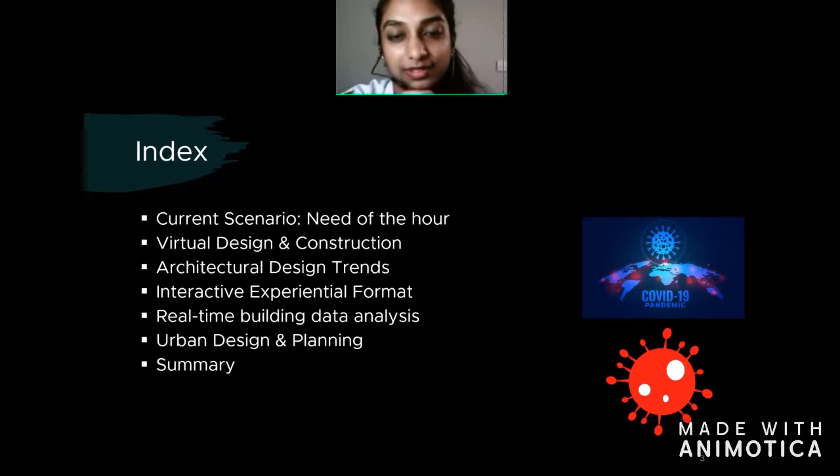Some of the keywords I compiled for this presentation and how I would be focusing on them: spatial proximity analysis and how it feeds back into urban planning and design; VDC, virtual design and construction, a very sought-after field of engineering and construction; next, digital interaction, which can be in the form of learning, entertainment, or just interaction in terms of communication.

Next would be gesture recognition, powered by AI and IoT to provide a touchless technology system in the near future, which is a very big possibility we might notice. Finally, energy models - how energy modeling is very important when it comes to dealing with the indoor built environment and the health of buildings in general.

As we all know, this pandemic of COVID-19 is continually upending and disrupting our lives across the globe, and it has become very evident that this will affect our built environment and how spaces are conceived in the future. The role of building technologies and building-specific software will play a big role in how we interact with people, with the built environment, and with nature. All this will be explored in a wide aspect.

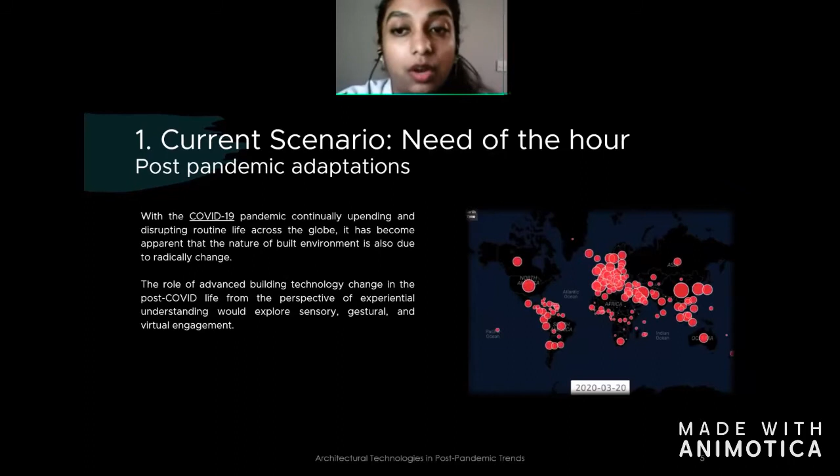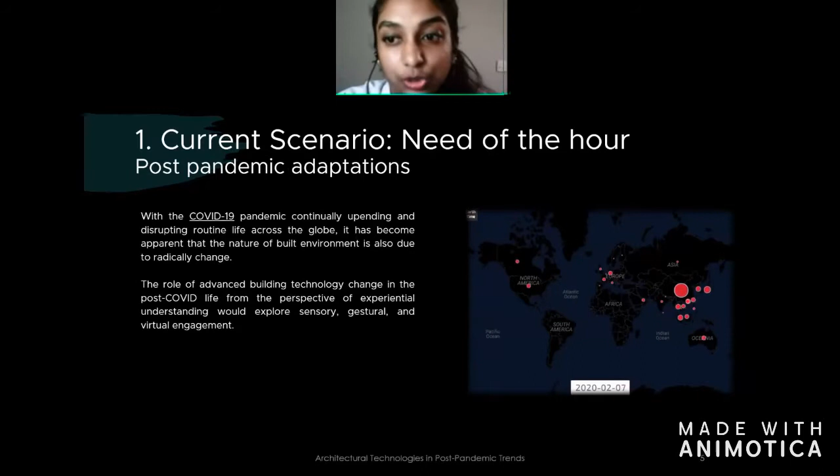So as you see in the map of how the COVID spread changed so drastically, it's very important that we come up with a solution immediately to deal with this widespread pandemic.

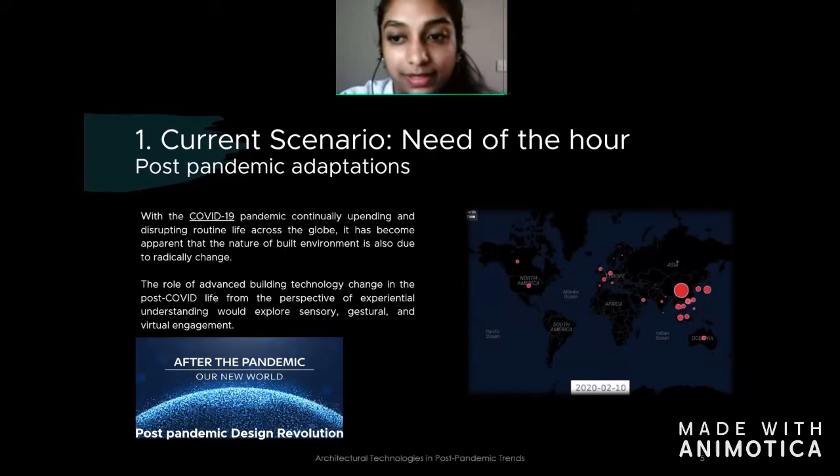So this definitely calls for a post-pandemic design revolution, which I believe will be noticed in the near future, and how we will take into account a number of factors while designing, while planning, while executing. So this term I would coin as post-pandemic design revolution.

As we all know, a lot of plans and strategies are being conducted presently to keep social distancing in mind, to keep 6 feet apart, to keep people from going out as much, and how this will all be narrowed down based on pedestrian movement and things like that. These are some of the basic things we will definitely see in the near future, and how innovative solutions to office planning, hotels, or even hospitals will be affected by all of this.

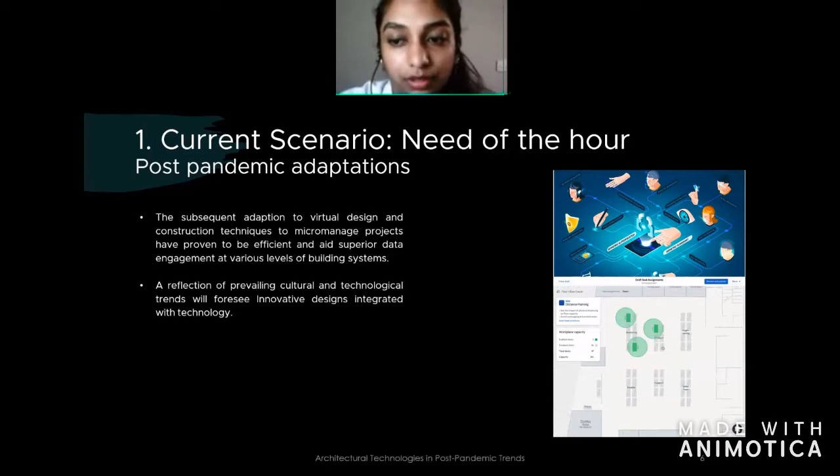So the engagement in terms of how the project is managed and how the data can be efficiently layered is something that is very important at this point in the year. And this could also be used as a virtual experience of events.

As you all know, festivals play such a big role in the cultural identity of a place, and there are already implemented techniques where the entire festival could be virtually online, and you could still get the same experience.

So the next topic would be virtual design and construction, which is a BIM level management of projects. With this pandemic and having to maintain social distancing, it is difficult to carry out site functions, but with virtual design, you can pre-analyze and pre-plan all your events virtually.

This also helps in collaborative meetings, and it has proven to be more efficient during this pandemic for a lot of companies here in the United States. VDC is very compatible with remote working environments, and using technologies by Autodesk has definitely proven to be very useful.

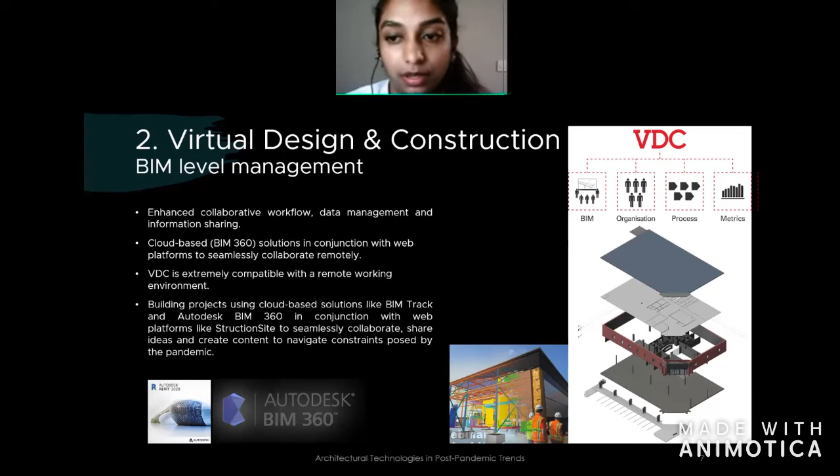And as I mentioned before, we would see strict guidelines in terms of how they're maintaining distances between people, distances between lines and queues, and all of this will tie down to how they are integrated on a larger plan or the urban design level.

As you all know, the smart city concept is not very new, but such things are proving to be more relevant now, and people are giving more importance to such techniques so that they can easily feed data onto buildings and have data integrated architectural planning systems, making it easier to monitor the spaces, have sensors in each of these spaces, and manage the entry points.

They can track contact tracing, guide people around more easily, have temperature checks, heat mapping, and things like that.

Such physical assets that are represented digitally are called digital twins. And such digital twins are powered by IoT and AI, and they can predict and even give you data analysis, or data analytics as we say, for future predictions of monitoring and resource planning.

So if a building is monitored entirely through sensors, then if one area is shown to have a higher heat map because of a number of people entering, or if one person might be contracted as positive, then the lockdown system of the entire building could be tracked and mapped from that one single room to the entire complex.

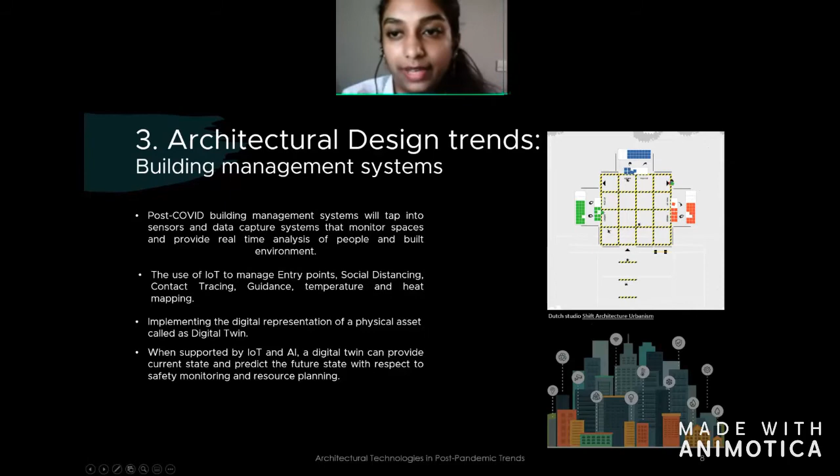So what you see above is a brief example of how Shift Architecture Urbanism Studio is practicing their guidance and their line system in terms of social distancing.

In a more interactive format, I'd see this experience of post-pandemic design trending towards gestural and sensory-driven recognition. Gesture recognition isn't new, but a lot of technology and research is going on in this field. With this being a contact-based virus, and contact being crucial in spreading it, it has become more important to have touchless or contactless technology, minimizing interaction with objects that might be constantly touched by a lot of people. Such technologies often involve interaction with keypads, buttons, or gestural interfaces.

The reason I put this reference is so we can see this as an example when trying to create, at an urban design level, parking systems or pedestrian walking systems. Such things can be overlaid or retrofitted in an urban design context.

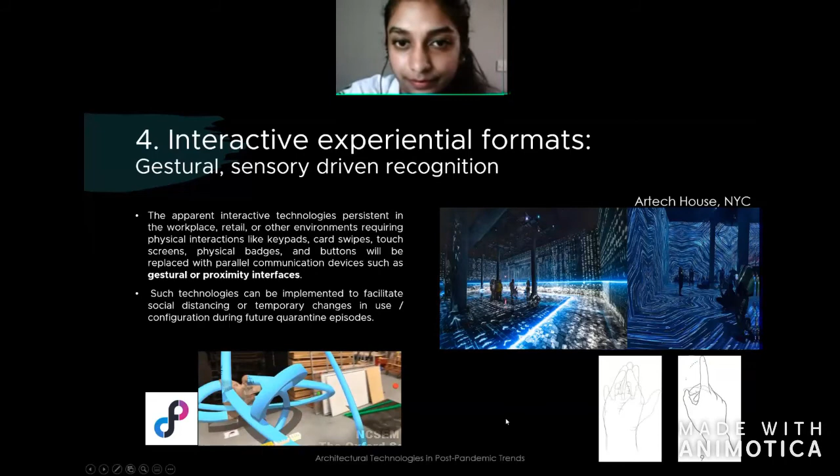I'm sure all of you know smart home technologies, where you have an entire integrated system tracking your home, from lighting to electricity to heating and ventilation systems to Wi-Fi. All of it is linked, and you can operate it with just your phone or a device from any part of the world.

This technology is going to be widely used in the near future and has a lot of scope in adapting to new environments, new people, and many locations together. This will actually bridge the gap between virtual and in-person learning.

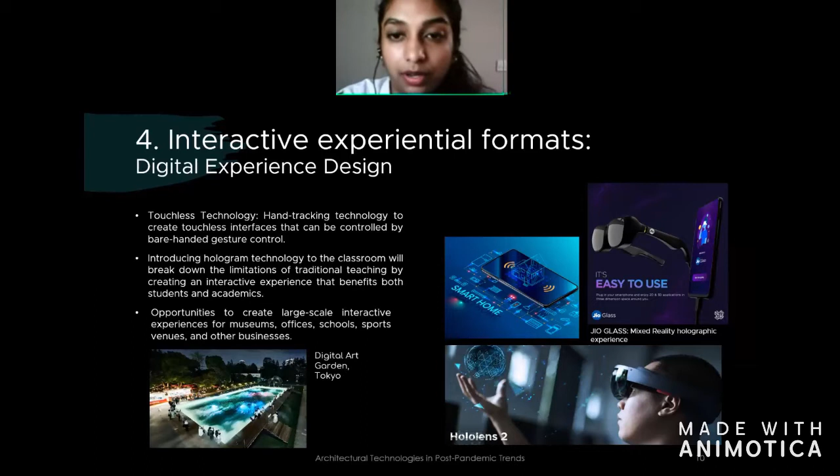The original HoloLens product is by Microsoft, similar to JioGlass, but HoloLens is more high-end and used mostly for VR and more on the installation or digitally created virtual reality side. Now people are realizing how important it is for virtual learning, so more startups and technologies are being released to deal with virtual learning and interaction.

The same concept can be applied to entertainment and visuals, as a gallery or recreational space. This is a digital art garden in Tokyo, using only light beams, connected with a system where each display is different at different times, giving a different graphic experience.

As you know, WHO recently gave a statement that this virus can also be airborne, in addition to traveling as droplets as mentioned earlier. So it's very important for the indoor health of the building to continually change its air, so the same air isn't being circulated—making the ventilation system a very important aspect at this point in time.

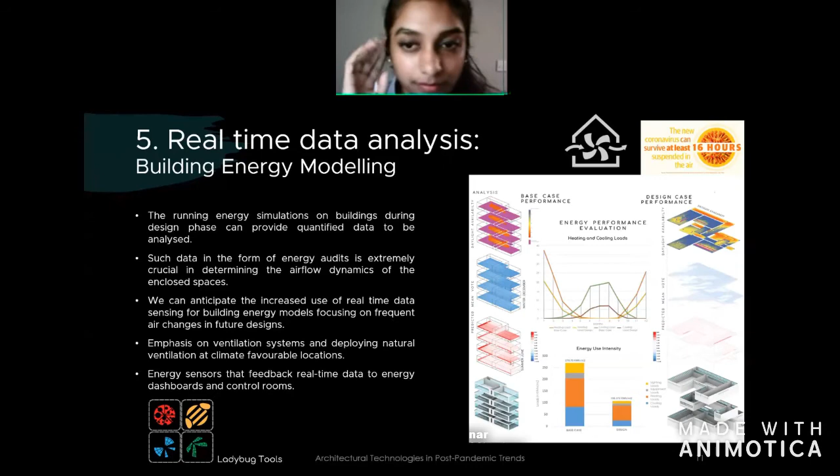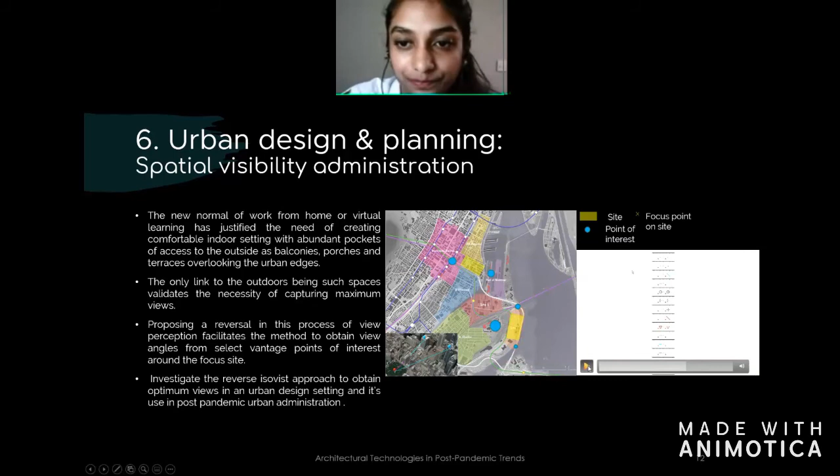Just to summarize all the technologies I spoke about, it is still at a very basic level. People are still scrambling to find out how we can quickly revive and go back to how things were initially. There are a lot of architectural environmental changes where there is distancing involved, controlling of traffic movements, having alternate shifts, and it's very crucial right now to have indoor climate health and enclosed spaces looked at in a more important manner to give a safer feeling instead of dealing with closed confined spaces with bad ventilation systems.

So spatial quality right now plays a very big role in terms of experience, health, and views, and how it finally ties back to how we respond to the virus, and how we respond to it emotionally in terms of our mental health at this stage. These environments can benefit from using technologies such as BIM and BEM. It can be used at various levels of construction. The digital technologies I spoke about could be a...

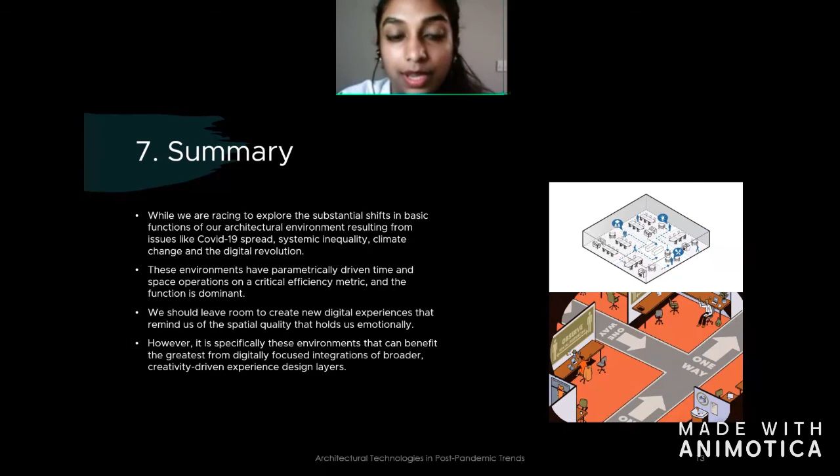...post construction objective where you could add on features of gestural movements and things like that. But on a more pre-design phase, you could go about planning bigger porches, bigger balconies, and see how you can tie that back to distancing, as well as having a strict metric system in terms of planning of units, and at a larger level, at an urban design level as well.